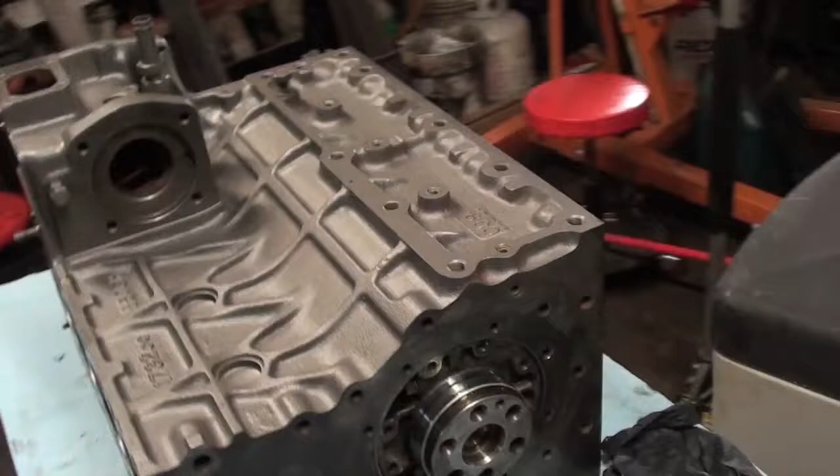So after putting the crankshaft in yesterday, the bearing cases go on the crankshaft, and then the crankshaft slides in through the end of the block, and this is obviously the flywheel side. And in the instructions it tells you when you put the bearing cases back on, there's a serial number printed on them, and that faces out towards the flywheel. And I've done that with these three, and then put the bolts in that hold them down.

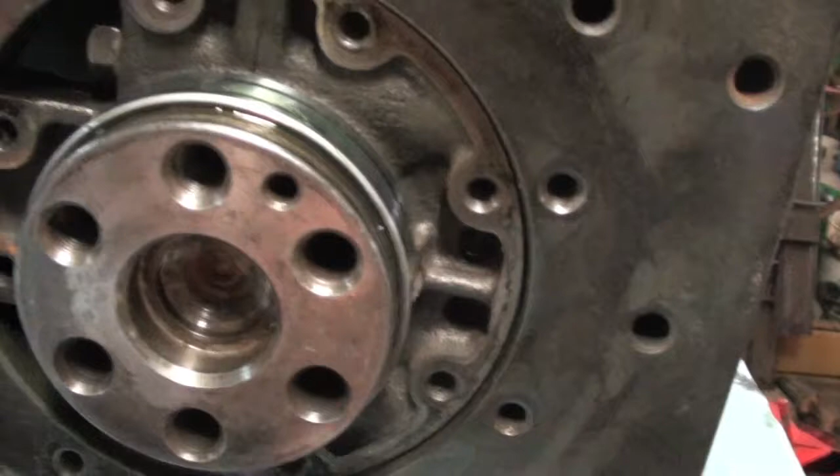But this last bearing cap, if you notice, it's got threaded holes right here along the outer edge of it. And on the inside of it, you can't see it right now, but it doesn't. Those holes are blind. And they take the cover with the rear main seal over it. Well, the problem that I'm having is those threaded holes are supposed to be facing out, but the serial number that's printed on that case is on the inside, not facing out to the flywheel like it should be.

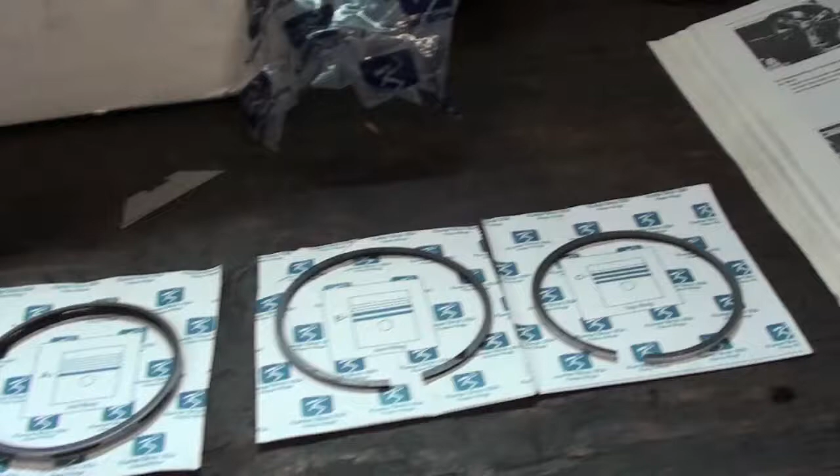I turned it around because in the manual you can clearly see that those holes are supposed to be facing out, and I'm a little confused. I don't know if they stamped the numbers on the wrong side of this set or what happened. If I have them all backwards, I'm not quite sure. So until I start putting connecting rods in, I'm going to go ahead and build the pistons and rings and everything, and then before I install all this, really kind of take a look and ask some questions and see what's going on.

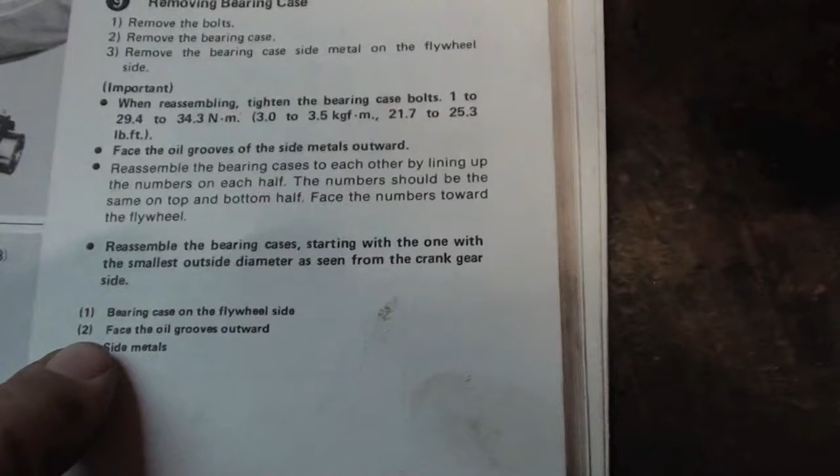But you can clearly see that right here it says reassemble the bearing cases to each other by lining up the numbers on each half. The numbers should be the same on the top and bottom half and face the numbers towards the flywheel. And I did that, but like I said, those holes would be on the inside, and that doesn't make any sense because the flywheel goes right here. So I don't know what's going on. So, but anyways, let's get to this part.

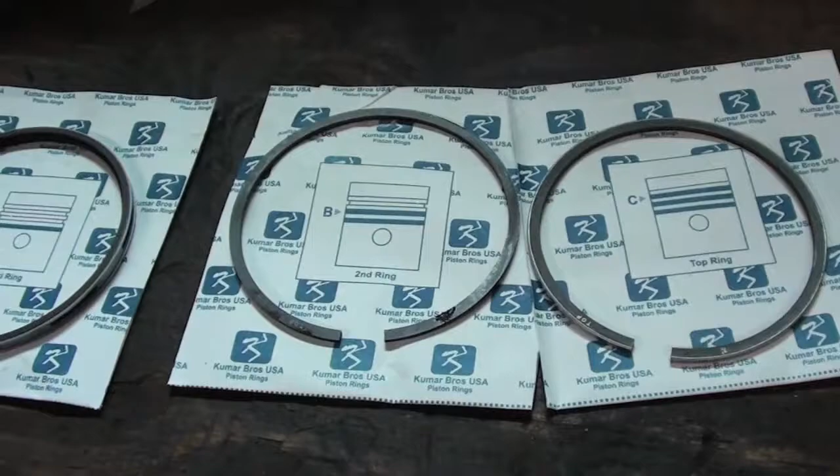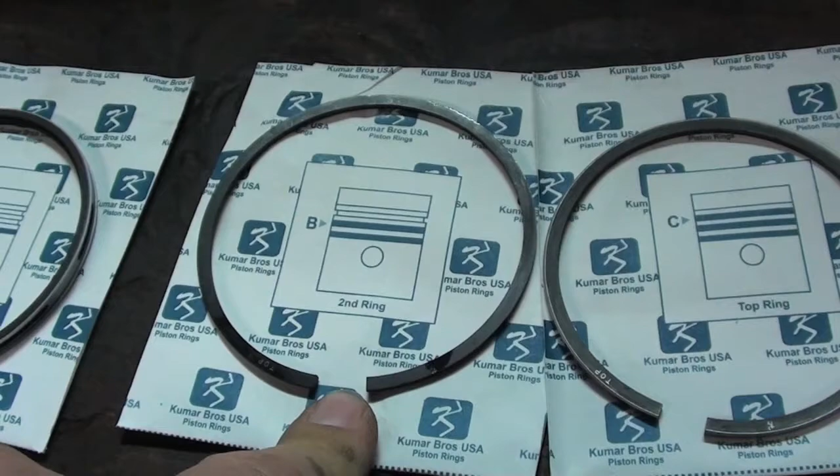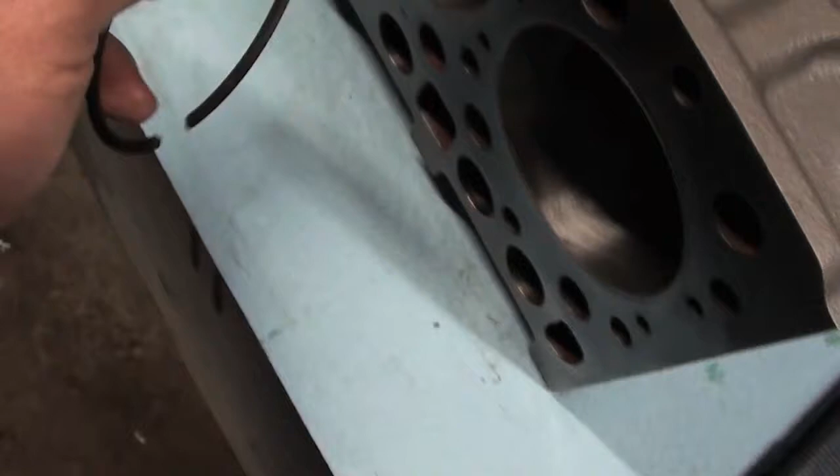So when you're setting up your piston rings, before you put them on your pistons, you want to check the gap in between them. And the way to do that is by installing them in the block and then going with a feeler gauge to try to see what that number is. And the number can be anywhere between, I think, 0.30 and, I don't know, 4.5 or something like that. So what you do is, you see it says top on it. You're going to install it that way, so they're going to be facing the top.

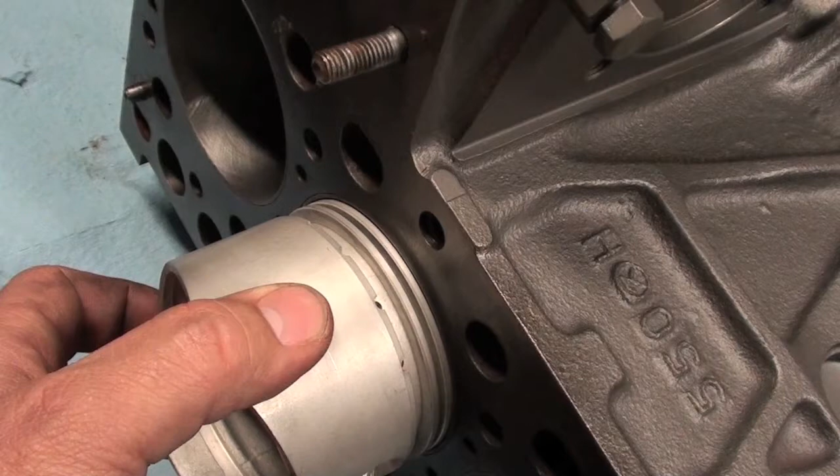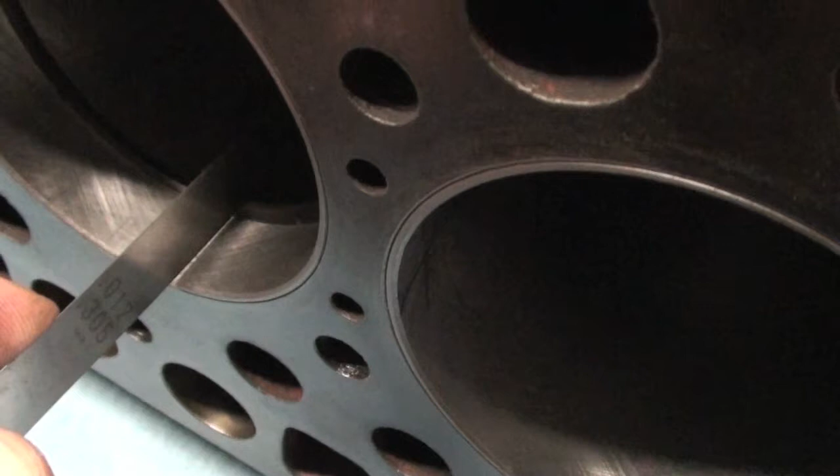So you just slide a ring in here like this, flip it down, and then with a piston, you just slide the piston in here a little ways till it's lined up, till it's parallel, like it is. And then come here with a feeler gauge, and I have the 0.30, it's a 0.305, and it fits right in there. Okay, so once you have that, I have a little burr on the end of that thing, but it fits in there nice. There you go. So I know that that is the right size.

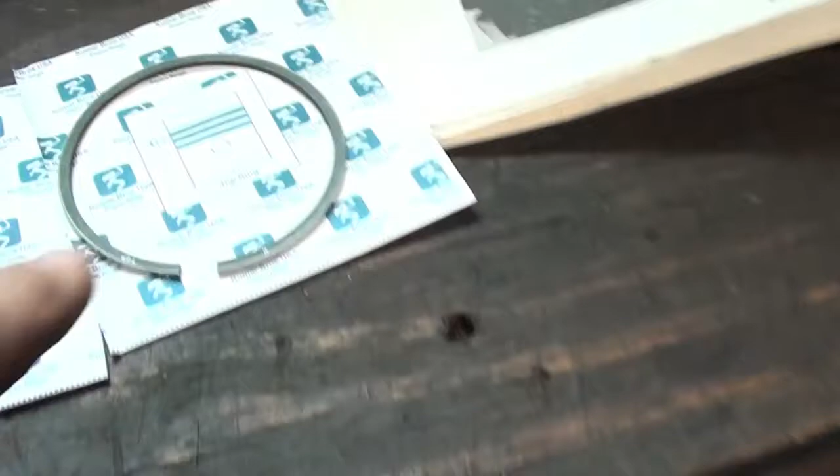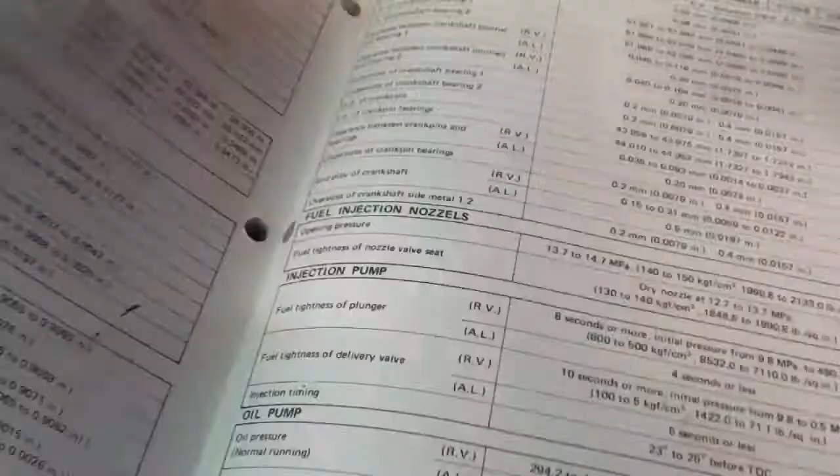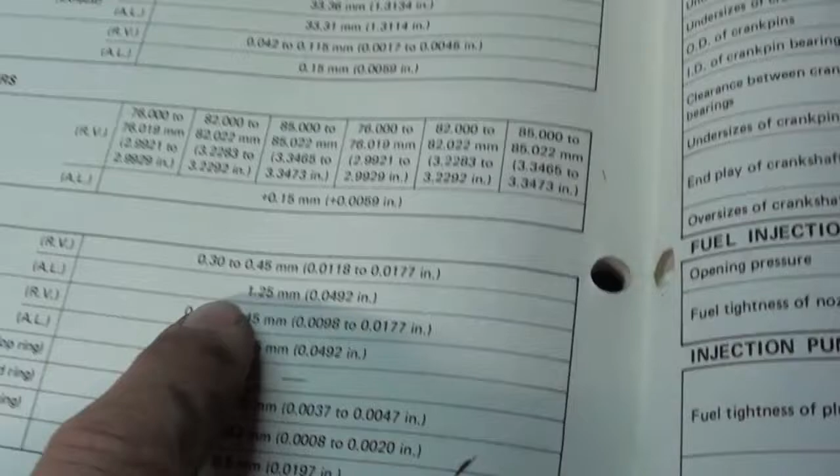And then we're going to go ahead and do it with the C ring, which is the top ring. We're going to do the same thing, check the gap. And with these oil rings, you don't really check the gap. I suppose we do, but I don't know. Let's see what it says on the manual. Oh yeah, oil ring, 0.25 to 0.45. So they're all 0.25 to 0.45 millimeters. So that is what we're going to check that at. And then I'll show you how to install them on the piston when we're done.

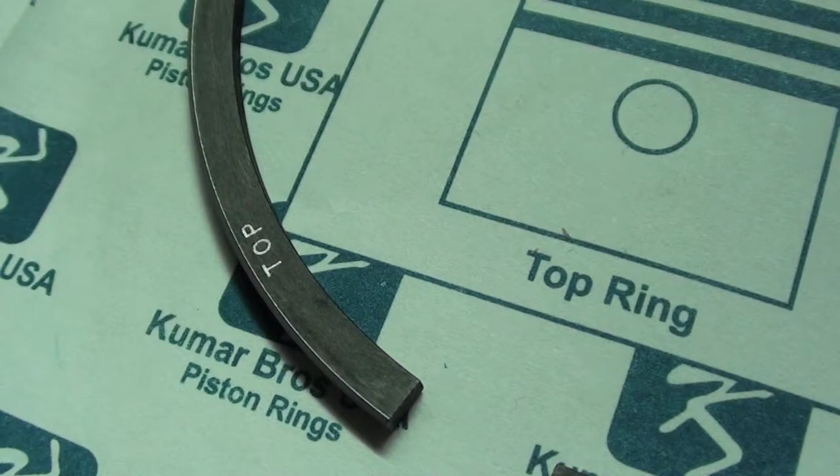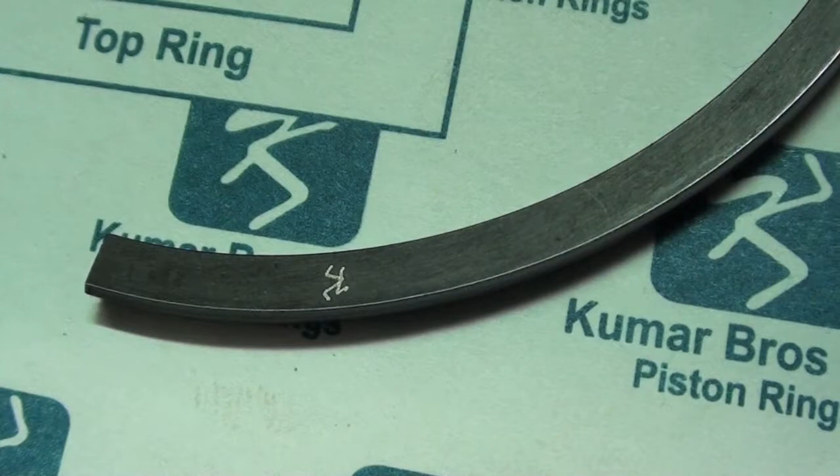Like I said, when you're installing your piston rings, there'll be a number or word or a top, serial number or something at the top of the ring that you want facing up the top of the piston. These rings also have their logo on them, and if you'll notice on my oil ring, the logo is right there. Where'd it go?

Yeah, the logo is right there because it doesn't say top anywhere, so I'm just going to face all the logos up. This one here says top, so I'm just going to face all the logos up.

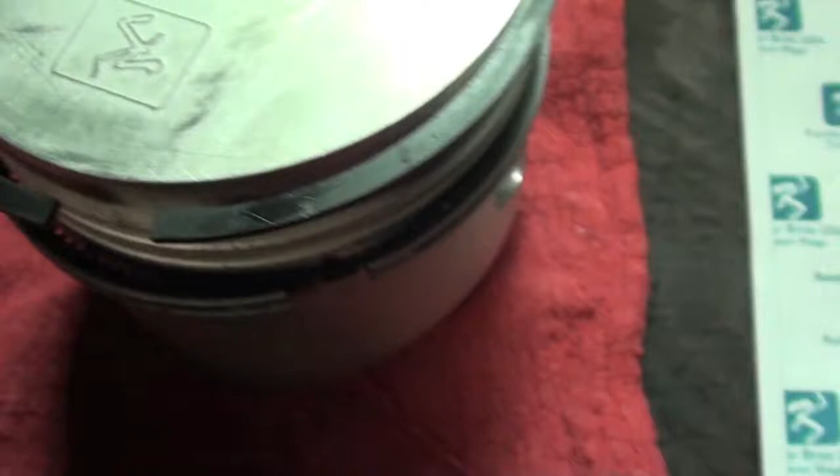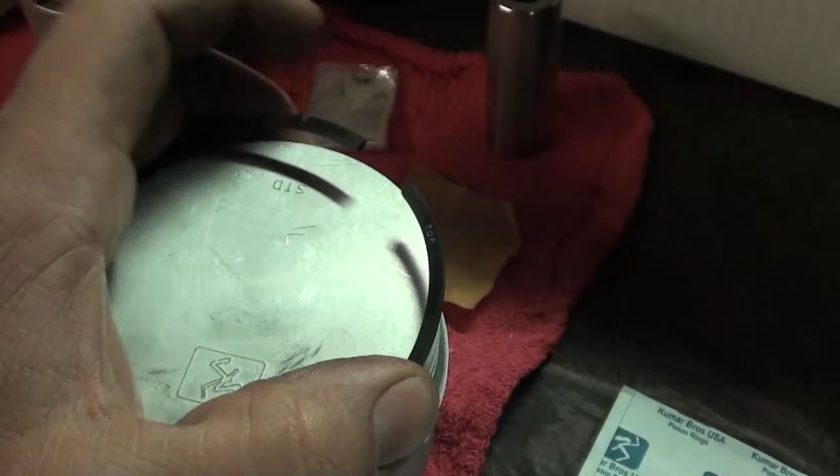And when installing the rings, I need two hands, but you just kind of feed it on from the back side of the ring and just go around and start spreading the ring open as it slides on the piston. It's kind of a pain to do. They have special tools that go in here and widen that. You could just slide it over, but I don't have that, so we're going to do it the old-fashioned way and just slide it on. So let me get that done and I'll show you what it looks like.

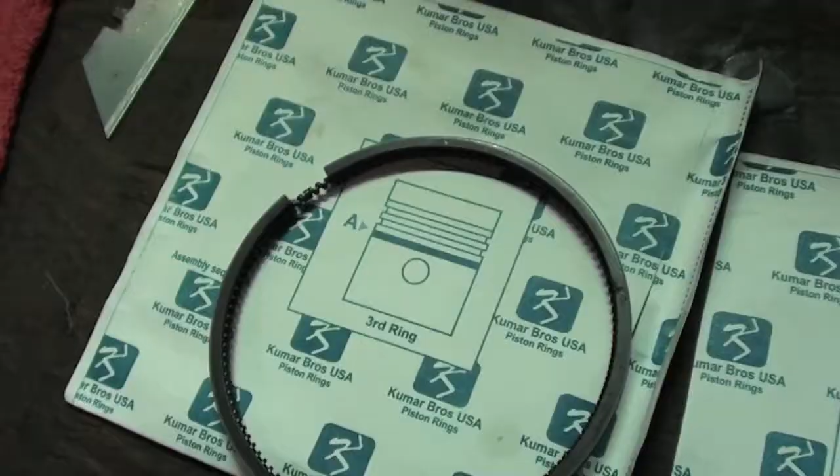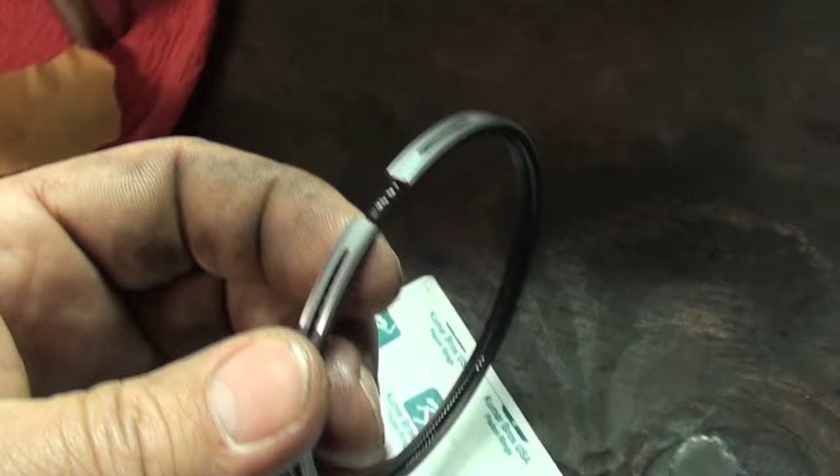Okay, another thing I want to point out when installing these rings is if you look on this oil ring, you can see that spring. See how that comes apart? You want that gap 90 degrees from this gap, so you want it down on this side. It's harder to do it when it's on the piston, but you can just spin this spring inside that ring and get it on the other side.

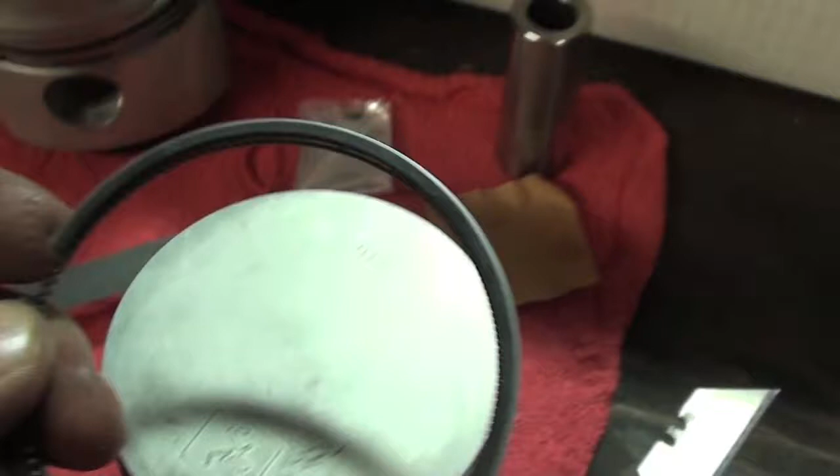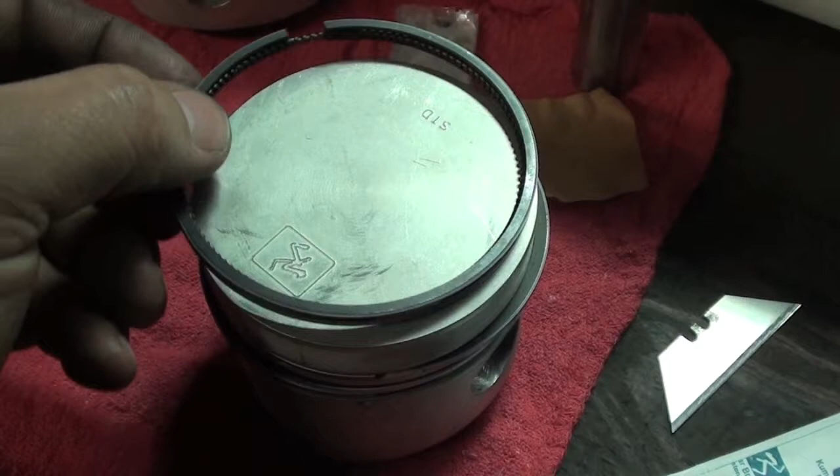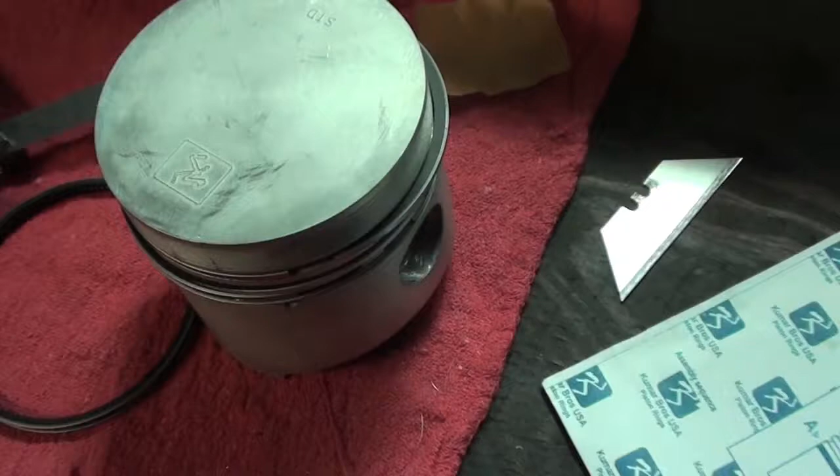And then once you put them on the piston, you want these gaps, all three of them, 90 degrees apart from each other. So if I'm going to put this ring here, I'm going to run this one, the next one here, and then the next one here. So have them 90 degrees from each other, and then the gaps don't line up. So that's the way you do that. So I'm going to install the last rings on these pistons, and then we're going to go ahead and put them on the connecting rod.

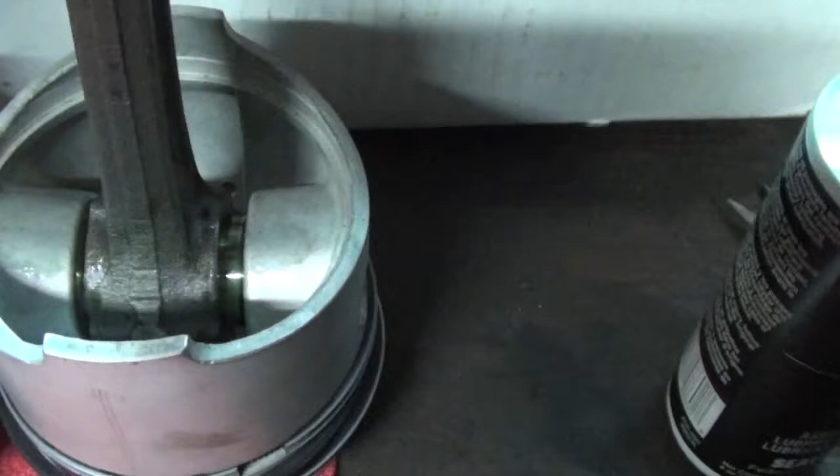Alright, now that I got the connecting rods installed in the pistons, just make sure when you're putting in your wrist pin, put some assembly lube on there. At initial startup, everything's going to be dry, so it'll get some nice oily stuff on your wrist pin, and you're good to go. These being new pistons, they can go in either direction, but if you're going to reuse your old pistons, they should go in the same cylinder and they should go the same direction.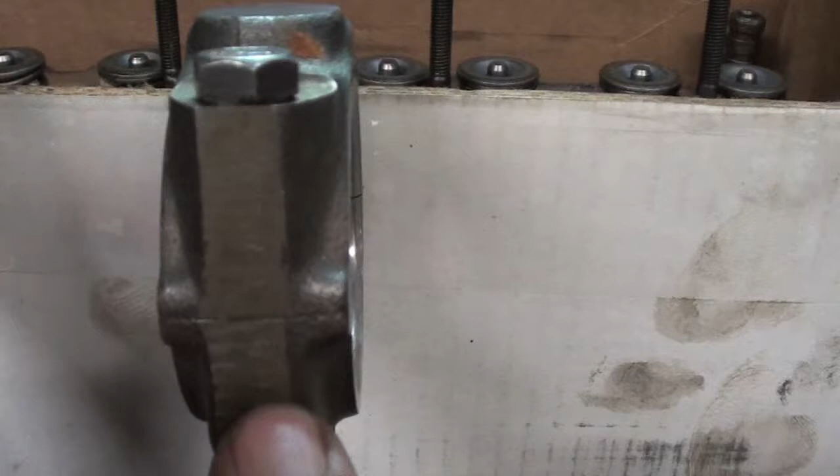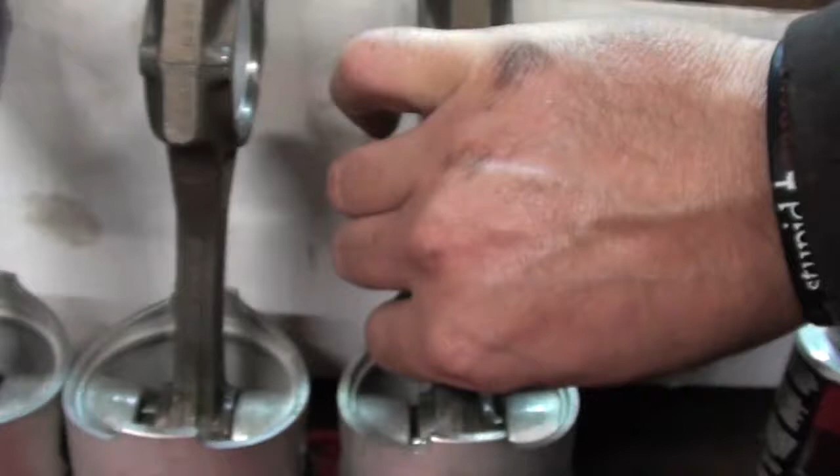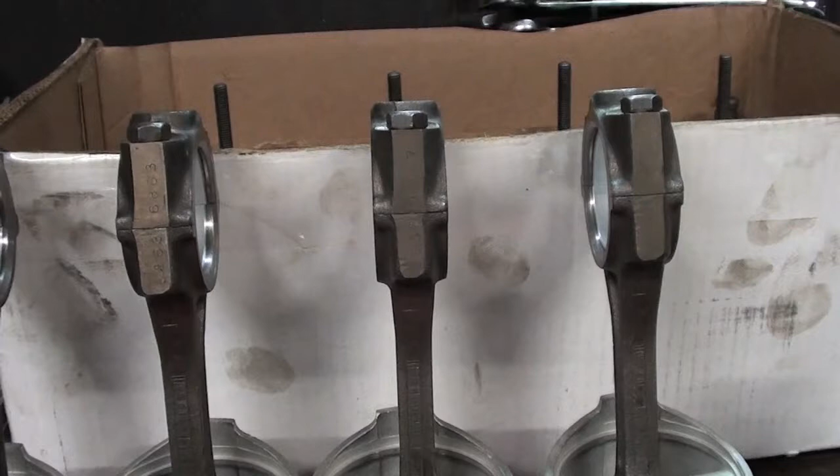But these ones are new, so I just made sure that the connecting rod serial number matches the top and bottom cap, and then they all face the same direction, and the STD label is on the same side as the number. I don't know if that's all necessary, but that's just the way I did it. So now all pistons and connecting rods are facing the same direction.

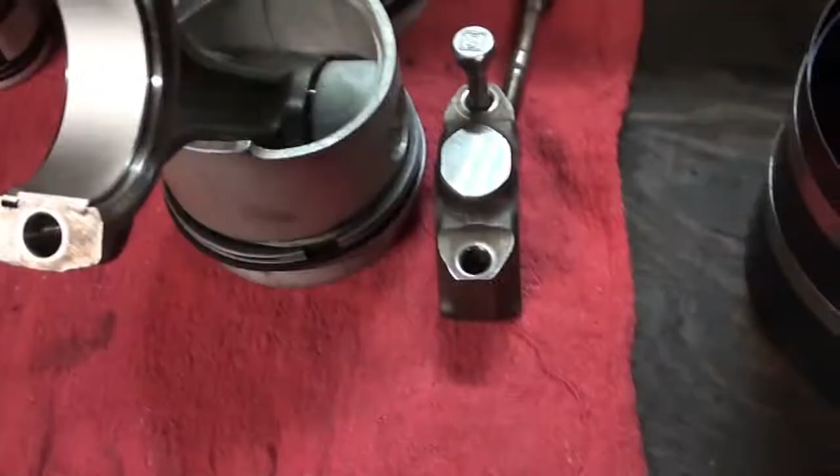Alright, so this is what I found out. This definitely has to be facing out this direction. These threaded holes are needed. So even though the stamp number is on the inside, this is the right orientation. So we're going to go ahead and start to put in the pistons. First thing, like I said, I had mine sitting aside so the caps are off.

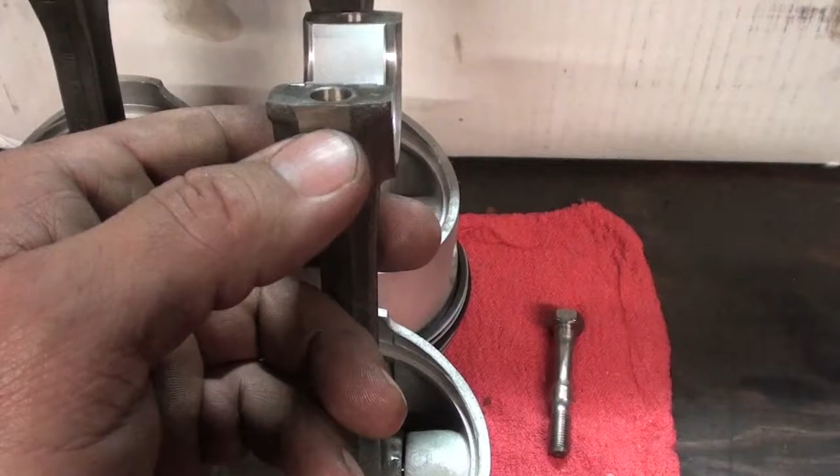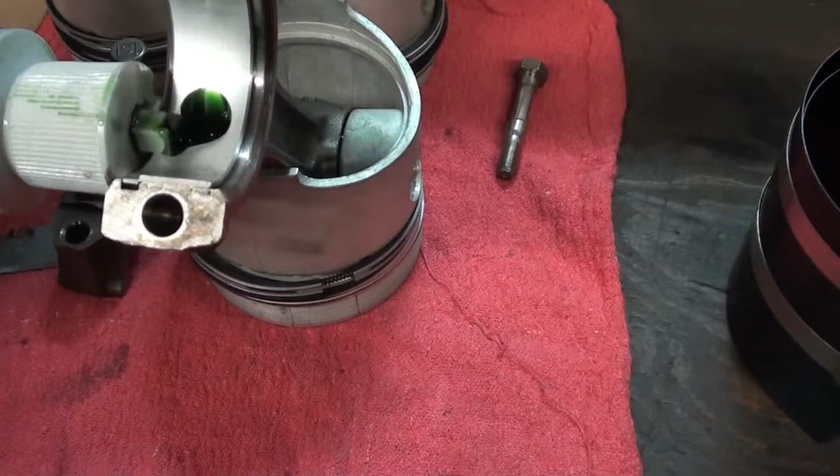Now remember the serial number that's stamped on the side is going to match up with this one, and they're both going to be facing up this direction, facing the injection pump. So first thing you're going to want to do is grab some assembly lube and put a nice good glop on there. This is some really thick stuff, and just get it in there nice and liberal. Okay, and then I gotta go get this set up on the block, and I'll show you what's happening next.

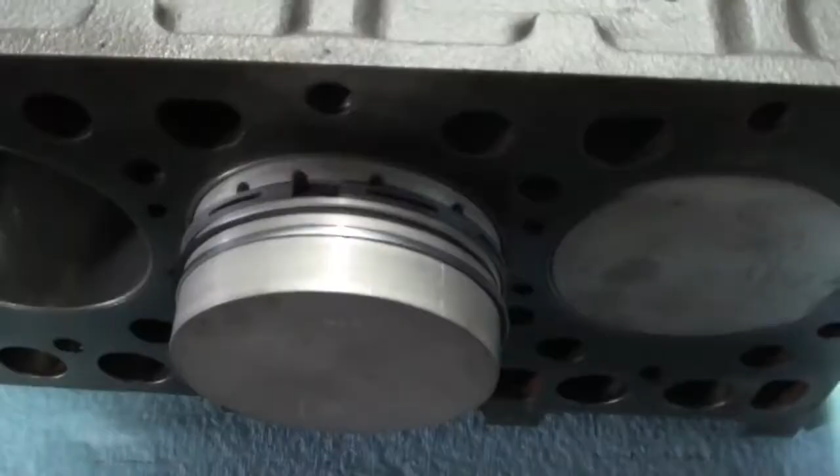Okay, next thing is you're gonna insert the piston in the cylinder, making sure that the gaps on the rings are 90 degrees apart. So one's here, next one's over here, third one's over here. Now I gotta get my ring compressor, install that, and show you how to put it in. Once the ring compressor is on, you should be able to see the liner, the sleeve on the cylinder, all the way around, which we do, so we know I got the rings compressed far enough.

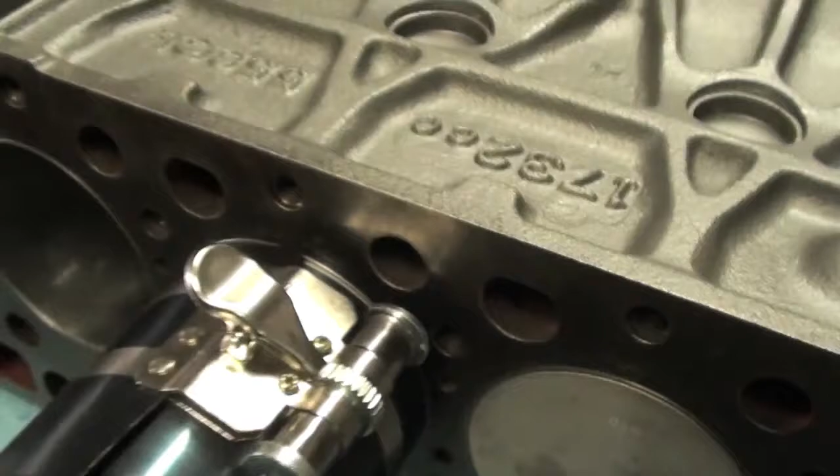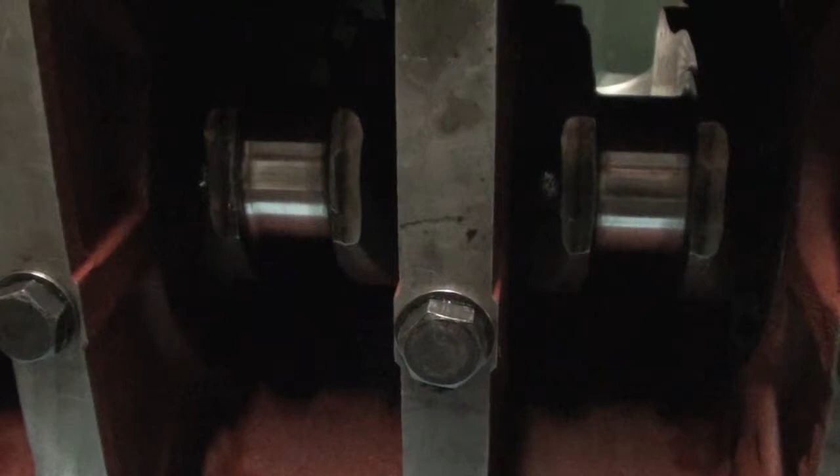And then with a wooden handle, well, first thing I do is orient the crank lobe all the way down, so that when I start pushing this in, it's not going to make contact with it until I want it to. So we're going to go ahead and put this in. So hang on.

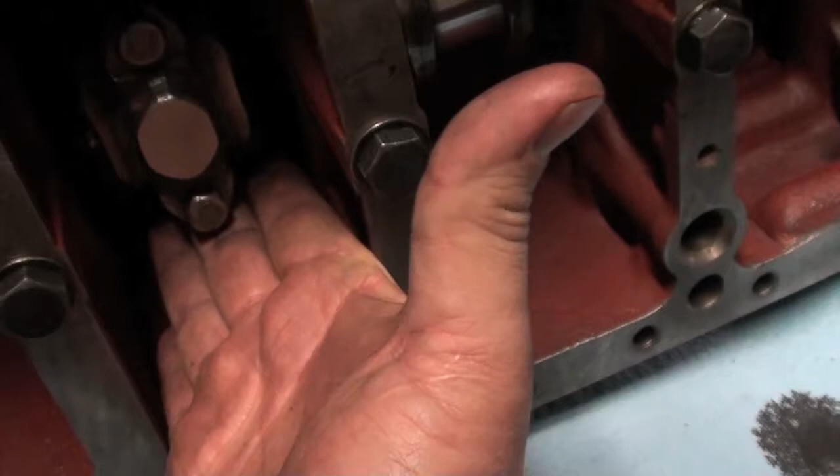Alright, with the crank all the way at the bottom, once you get the piston in there flush, the ring compressor will fall right off. Just come over here and hold your hand in here and support the rod. And then with a hammer or the end of a mallet, just tap on it. It'll slide down pretty easy, and just guide it onto the crankshaft with your other hand.

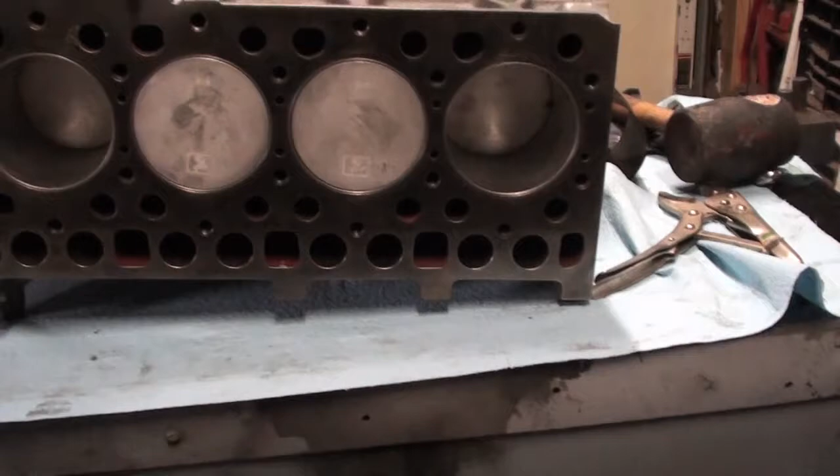And once it's on, put the end cap on and, you know, snug them down. We've got to torque those in a second, but I'm just going to throw these other two in real quick here, and then we'll get to the torque. Okay, there they are installed. All labels are facing the same direction on the connecting rods.

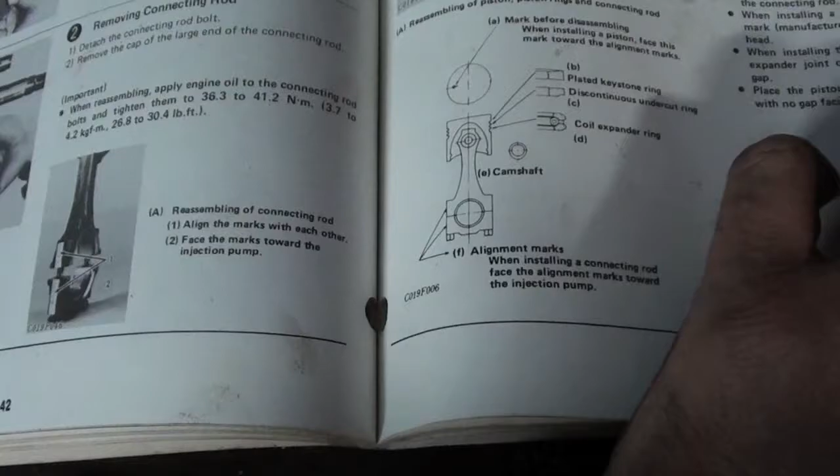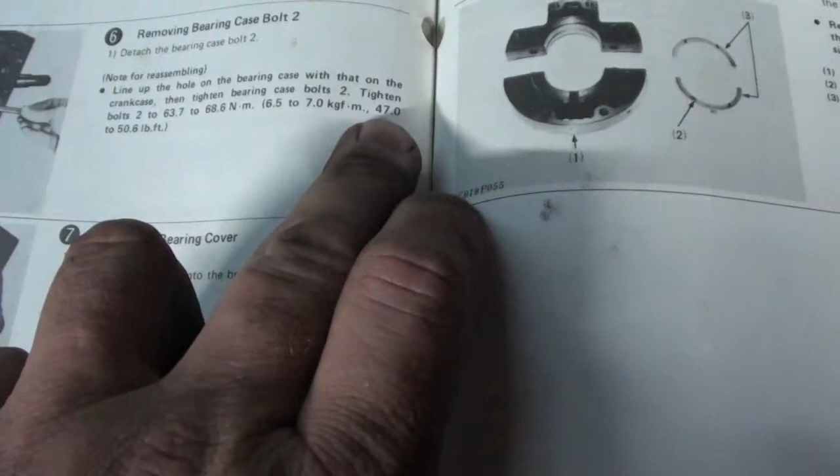So I'm going to go through here and torque these down. I've got to look in the book to see what the torque specs are, and we'll get to work. Alright, so I went around and did the connecting rods. It's 26.8 to 30.4 foot-pounds, and I went like 29.5 on every one of them. And then for the bearing case bolts, they want 47 to 50.6 pounds. I went like 49.5 on all three of those. Okay, so we're all torqued up, everything's ready to go.

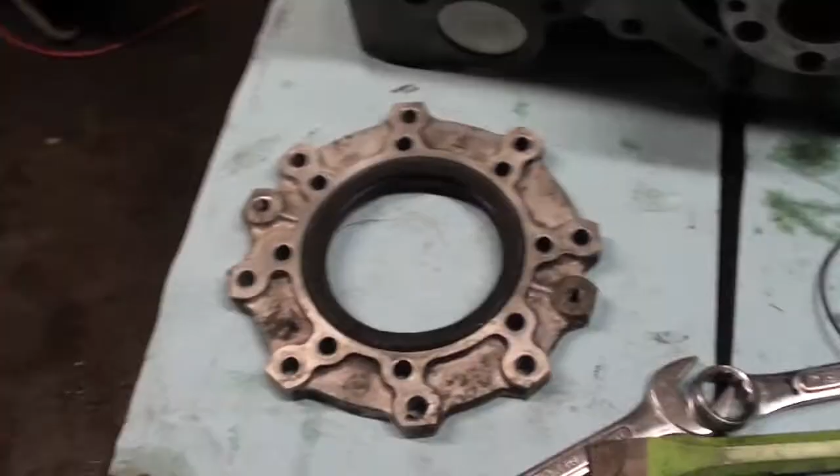Alright, so I dug out the bearing cover, and that's this piece right here. And as you can see, it has a seal in it. I had knocked the old seal out, it came apart when I did it. Just knocked it out from the outside. I just put a chisel inside that ridge and tapped down on it a few times. It popped out pretty easy.

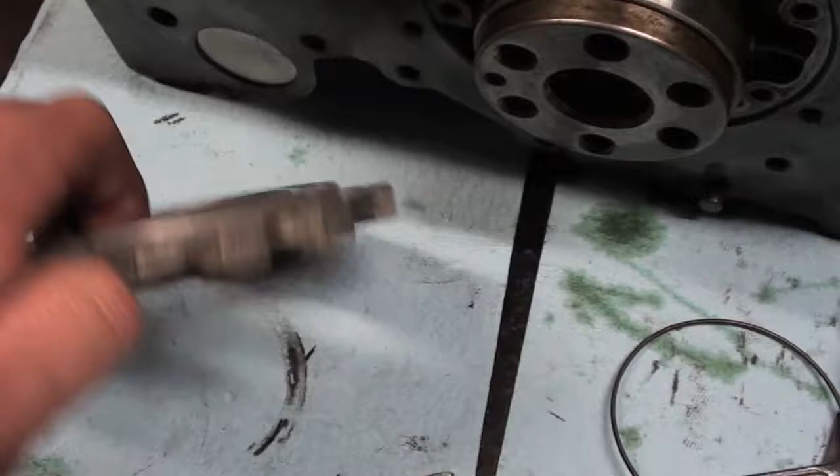Then I laid the new seal, the flat side facing out, on the counter, and I just put a little bit of oil or grease around the outer edge, and then I put the cover over the seal, tapped on it a few times with a rubber mallet, and then hit it the rest of the way with a rubber mallet. It slid in nice and easy, and that's the way it goes.

So as I was saying before, these threaded holes have to be out, and they do, because you put the cover on, and I don't remember which way it went. I'll figure that out in a minute when I have two hands, but it goes on, and then the outer holes line up with the holes on the block. The inner holes line up with the holes on these bearing caps. So I'm going to go ahead and find the hardware for that and start installing it, and I'll show you when I'm done.

Alright, I put the bearing cover back on. It comes with two gaskets, one for the inner one and one for the outer one. And if you look at yours very carefully, now I'm sideways because the motor's laying on its side, but these two bolts here are closer together than any of the other two bolts. So I knew that's the way the cover went on.

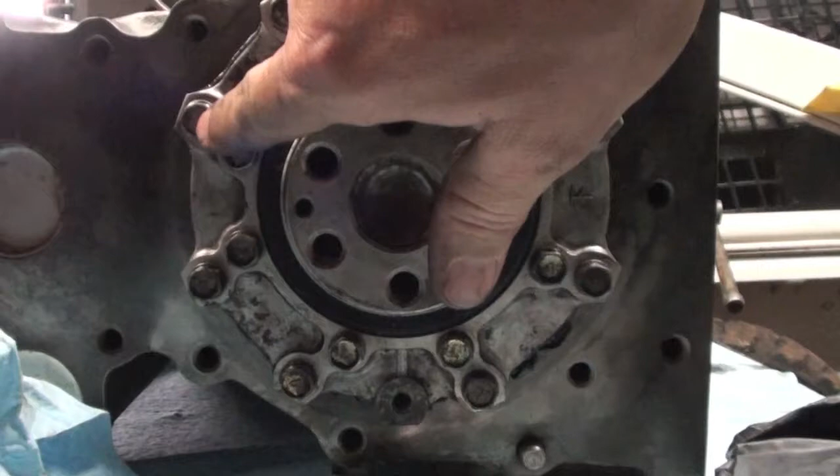And I put these inner ones in first, because that goes on that bearing cap. And then once that's on, you can actually physically turn this a little bit to line these bolts up to where they've got to go, and then put those on. So now I'm going to torque them down.

Alright, that's it for today. I got everything torqued down. Everything's in that I wanted to be in today. So we'll get back at it tomorrow. Not quite sure what end of the motor I'm going to hit next, but I'll read my manual and see what I've got to do.